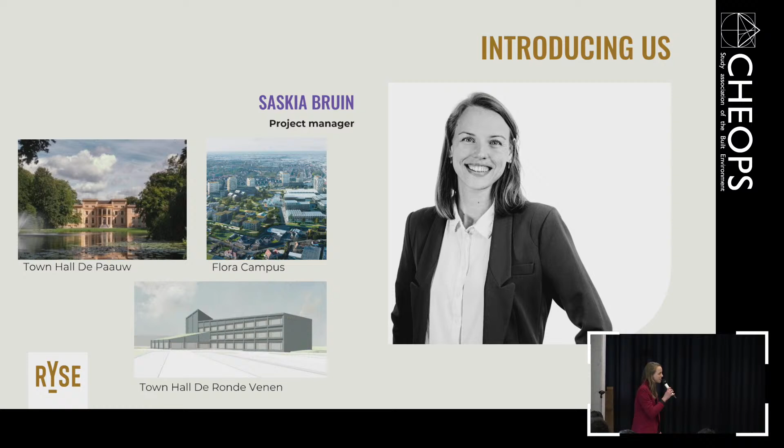So I think you all know today we're going to talk about preserving heritage and monuments and why, in our opinion, that is important and how we handle that.

But first, let me ask you all a quick question, and I want to see hands. How many of you have done a project where you can work from scratch? So like there's a building plot with no other buildings on it, or you can completely demolish the buildings that are there?

Yeah, so the majority. How many of you have worked on projects where you have to take into account the buildings that are at the plot? So you have to leave them there, or you have to barely alter them in order to make your project work? Yeah, so that's slightly less hands.

So that's exactly what we thought. It's very easy for people to just think, okay, we have a plot and we're just going to scrap all the buildings that are on there. But that's not always the best thing to do.

I'm sorry, just a moment.

We think it's really important to look into the buildings on your plot and research whether they have monumental value or not. If they do, they have to be looked at with a different approach, because many buildings are historical evidence that is lost once demolished. In the Netherlands, there are approximately 63,000 monumental buildings, so at some point in your careers you'll have to deal with them. These buildings have to be maintained to preserve the history, but in many cases they ultimately lose their original function because it doesn't fit contemporary times, and they need adaptations.

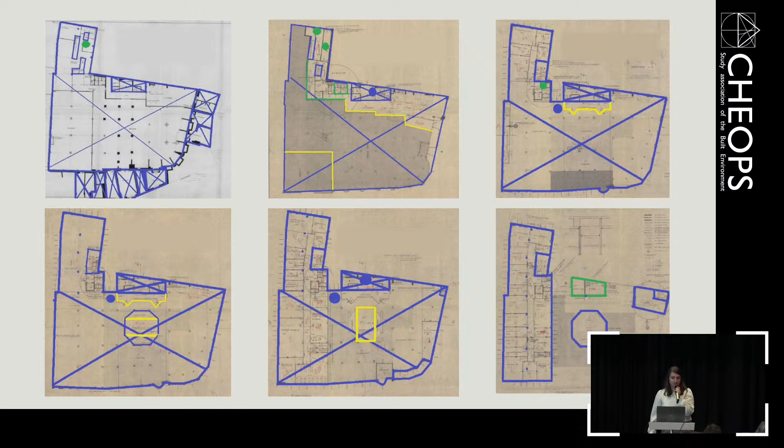With this research, we could look at the restauratieladder to see what we wanted to do. Looking at the new function of the building, a museum, we decided that renewal was the best option because we could leave the structure intact, we could leave the facade intact, and it would give us a lot of room to add on to that with internal features to make it completely fitting with the new function, and also look at sustainability.

And of course, we're not doing that alone, so we work in a team with the Children's Book Museum itself, Van Hogevest Architecten, Burgi, which is the contractor, and Soda, a company that works really well with museums, looking at building physics but also people flow through the building, and the Municipality of Utrecht, because the building is actually owned by them.

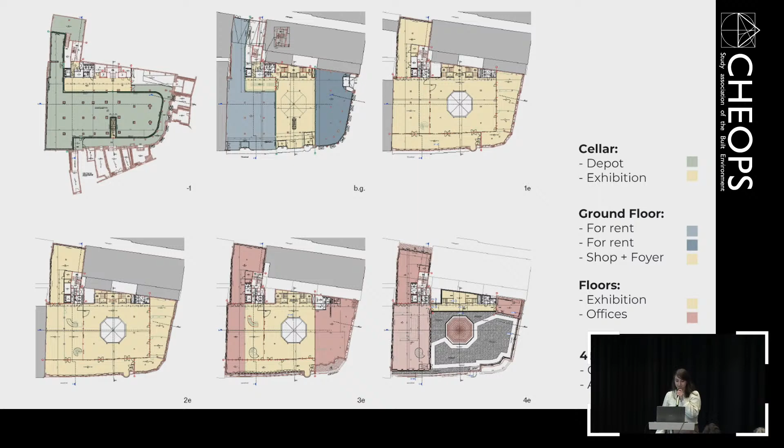And then on the top floor, the fourth floor, we're making a rooftop garden with the museum cafe and also a room where writers can rent a place where they can just sit and write with all the facilities they need nearby.

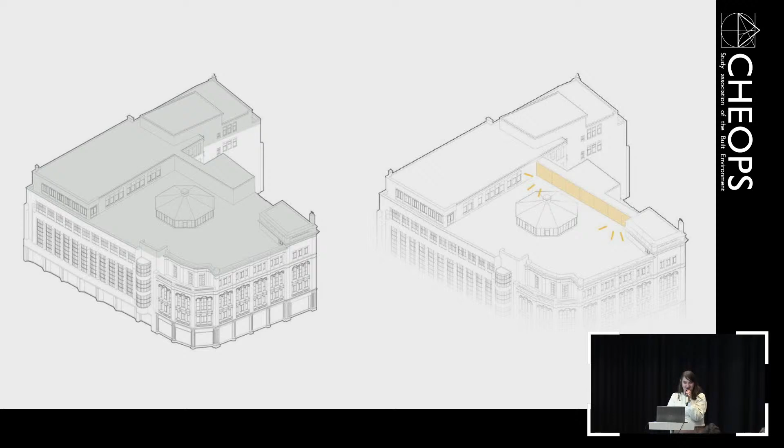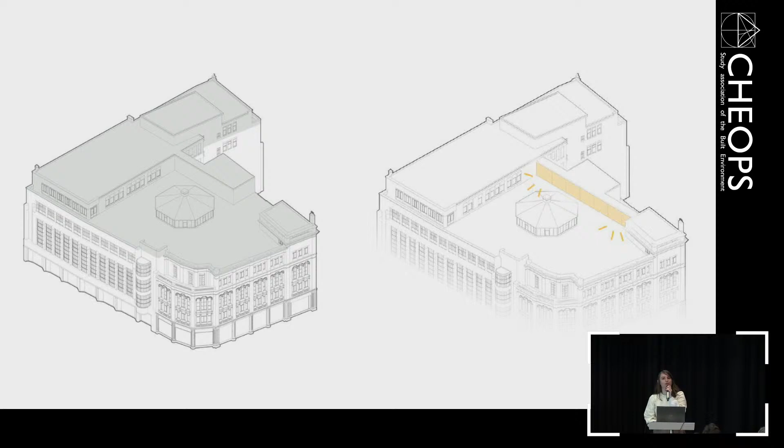So this is a 3D picture of the old building, and I'm going to show you now what we're going to add to that. One of the improvements we're making is that we're going to create a corridor that leads from the back, where the museum cafe will be, to the front, where the writers section will be. But this will also provide a glass corridor with views on the roof.

And on the roof itself, we're going to create a lot of PV panels and some greenery for the environment and sustainability. Those are ways that we can add that in, despite all the restrictions that the monumental value gives us.

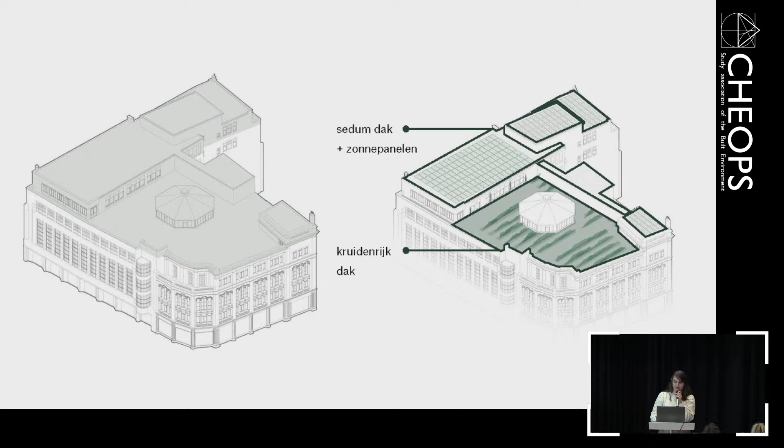So this is what the building should look like in 2027, and I hope that we can all welcome you there once it's done.

Then it's my turn. Town Hall De Paauw. Like I said in the beginning, this is one of the projects I work for. It's a town hall of Wassenaar, but it hasn't always been a town hall.

It was actually built in 1556 by the Van der Druijse family as their home. It was actually a lot smaller by then. And in the years after that, it has been owned by a lot of different families who all made their alterations until it was bought by Prince Frederik in 1838.

Prince Frederik was one of the sons of Willem I. So the royal family actually lived here. Actually, the plot next door is Paleis De Horsten, also owned by the royal family. And Prince Frederik actually made Town Hall De Paauw like it is today.

Until 1924, almost 100 years ago, it was bought by the Municipality of Wassenaar. And from that day on, it has been their town hall. A few years ago, they decided that their town hall had to be renovated to the glory days of Prince Frederik. They started by doing the exterior.

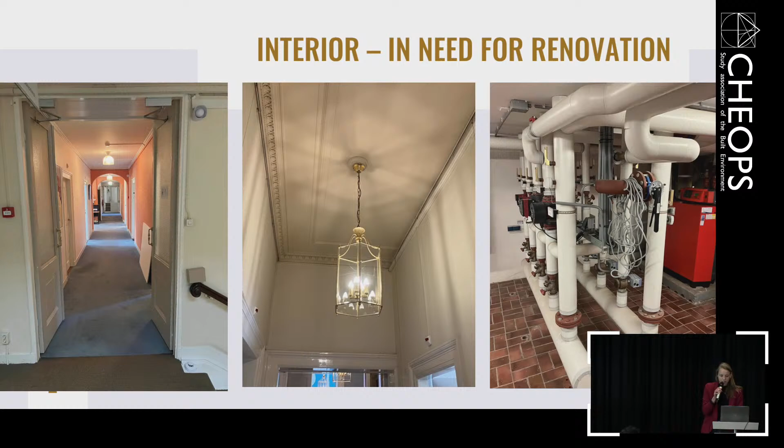Besides the fact that it's all very old already, they just want to do it right, and they want to restore the building to the glory days of Prince Frederik. Like I said, that's where we came in. So we started last year.

We started last year, and this is an example of a repair project. So we're not looking for new materials to make an old building. We're actually looking for the old elements, looking for the exact same materials, looking for the exact same colors.

If you walk through the building, you see a lot of investigations where, with a very small knife, they just rip off all the layers of colors that have been used over the years to find the exact right color that was used in the 19th century.

And we don't do that alone. We work with architect Happe Cornelissen Verhoeven, which is also a restoration architect. For installations, we work with Deerns, and for building physics and fire security, we work with LBP Sight. That's the design team that we work with.

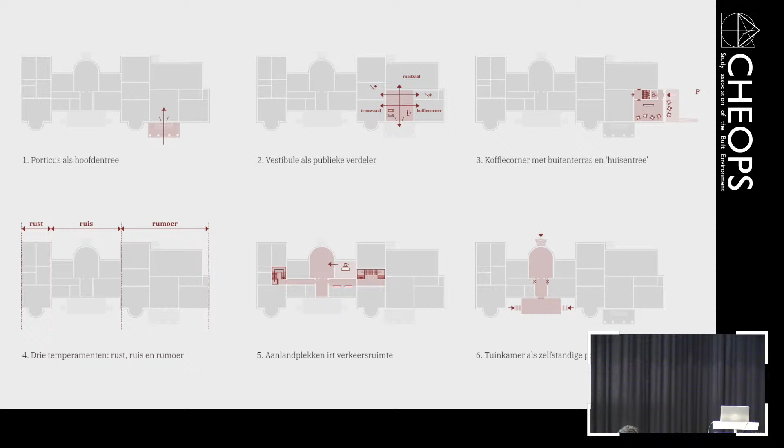And if you do that, you can actually use the vestibule or the lobby that was also originally located right here, as the entrance of the building, where you move all the public areas in the building.

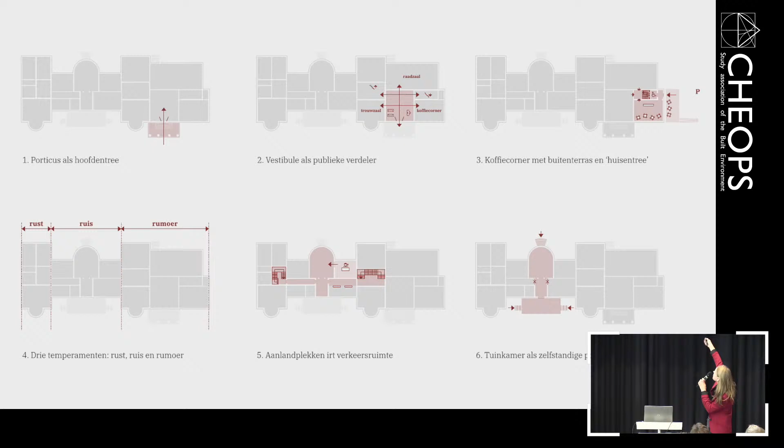This is also the location where we moved the new cafe to, because nowadays there is no cafe based in the town hall, and they really want one.

But since it's a monumental structure, you can't just open a wall and make a big room. This part of the building was built in the 1950s by the municipality itself, and therefore doesn't have the same monumental value as the rest of the building. That's why we decided to put the cafe right here, so we can open the façade as well and use this part of the gardens as a terrace.

By doing all that, we're actually going back to the historical structure of the building. If you look right here, where the new entrance is, that's where the old entrance originated.

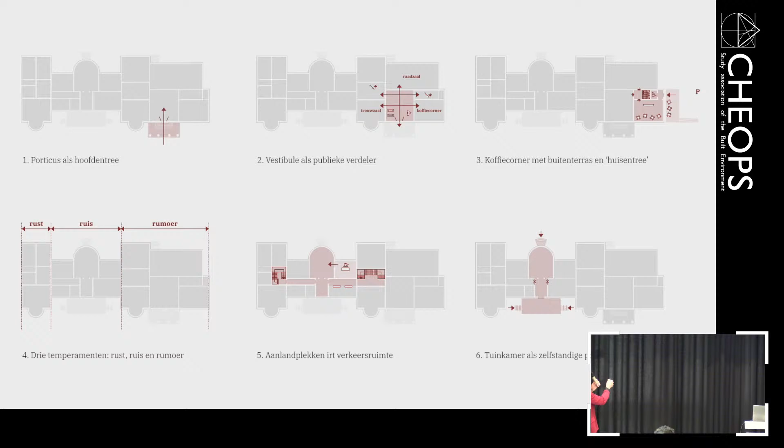Here you see very big and cold areas, which were the public areas historically. Now we're doing that again, making the big public areas the council chamber and the wedding chamber. We're keeping that on this side of the building because it was made for that. On the left side, you see the small rooms, which were historically the cozier rooms used as bedrooms. By using that same structure now for offices, we adapt the program of the building to the historic way it was initially designed.

The area in between, the traffic area or corridors, is used for flexible work offices or workplaces, where you just have desks you can sit at for a while before going into a meeting, for example. Then the hall next to the entrance nowadays will be designed as an exhibition area.

If there's ever a big exhibition, they won't use the new entrance because that's just not big enough anymore. They'll do it right here, which is very pretty because here you can see the water that we saw in the picture. So you have an entrance on that side and on this side - yeah, that works as well.

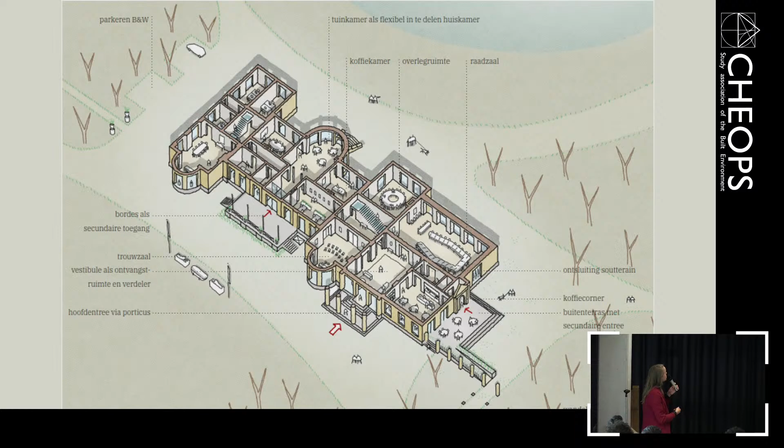Then over the years, when we started to need corridors because we wanted to work in silence and be able to close the door, we put in corridors - that's exactly the wall I showed you. What we're trying to do together with the architect is get that historical structure back into the building. So instead of making a corridor here with a new wall, we're adapting the interior and furniture to that historical structure, so you have a corridor which is still open, but you can still work, sit, or have a meeting right here in silence.

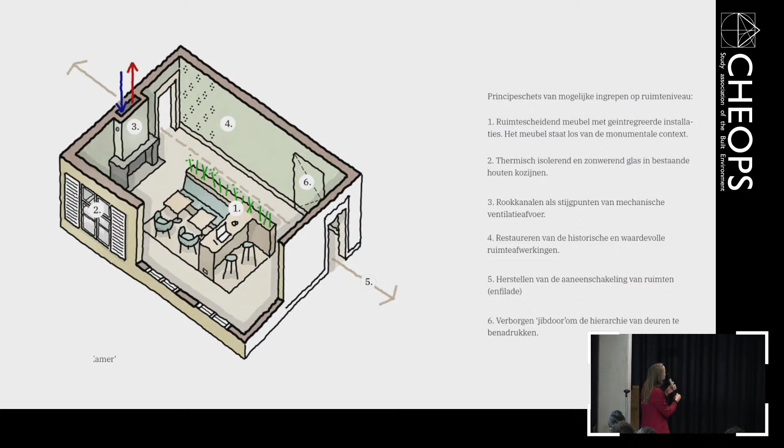That was a little bit about De Paauw. We wanted to give you some main takeaways from our presentation. Preserve monumental values by researching what you are allowed to alter and what needs to remain - that's very important, the research part. We hope we gave you some examples of how much of the process is based on the first investigations done at the beginning. Be aware of different building materials and techniques, and take this into account in the design and construction approach. Balance sustainability with historical and sometimes economical values, and use techniques that don't damage the historical structure.